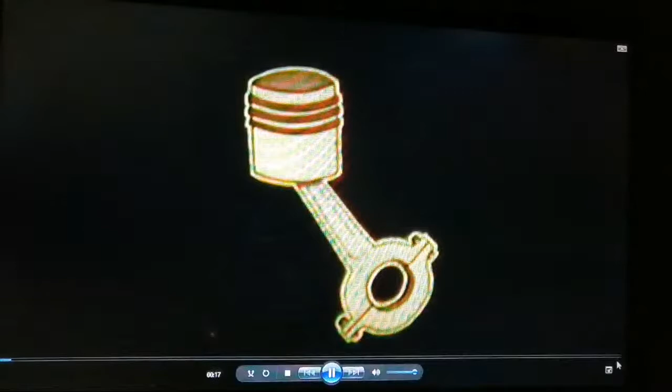Lubrication of mechanical equipment is important. For example, we check the crankcase oil level periodically when getting gas for the car. If the crankcase were dry, bearings would bind or seize, and we'd have an expensive repair bill. As with your car, proper lubrication is of vital importance in maintaining trouble-free operation and in avoiding machine damage or equipment failure at your power plant.

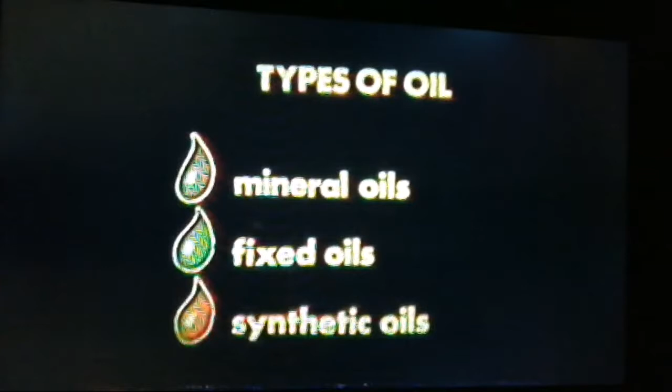There are several types of oil used as lubricants in power plants. They are mineral oils, fixed oils, and synthetic oils. Mineral oils are produced from crude petroleum by refining processes. After separation, further refining deletes waxy compounds, which become solids at lower temperatures. Then it's filtered to remove foreign matter. After this refinement, different grades are blended or mixed together to produce the various lubrication qualities desired by industrial users.

Fixed oils are of vegetable or animal origin and are usually called organic oils or greases. Vegetable oils are produced from seeds or fruits or plants or trees. Some of the more common are castor, olive, coconut, and peanut oil. Lard oil is commonly used as a thread or machine lathe cutting lubricant. One or more of these compounded with mineral oils form a steam cylinder oil lubricant, which will mix with steam and still lubricate well. Animal oils have very little value as lubricants when used by themselves.

Synthetic lubricants are compounded from elements other than mineral and organic oils, and in many cases are far superior to petroleum-based oils. Generally speaking, synthetics have a very wide temperature range. One type of silicone synthetic oil will provide good lubrication from minus 40 degrees Fahrenheit to 300 degrees Fahrenheit. These lubricants are quite expensive, but are stable and long-lasting. As the quality of synthetics is being constantly improved, their use is becoming increasingly popular in special applications.

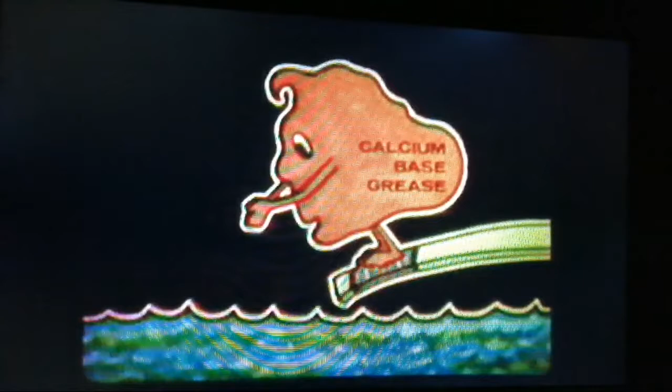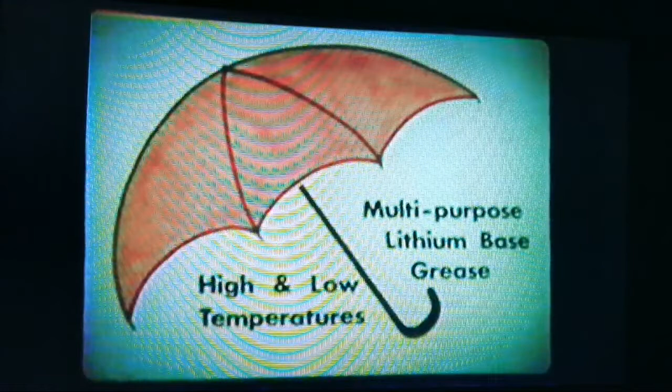Calcium-based grease is suitable for use in the presence of water and is used as a pump packing grease. It is not suited for use, however, at temperatures higher than 180 degrees Fahrenheit. A soda-based grease, on the other hand, will withstand quite high temperature, but will wash away in the presence of water or steam. Lithium-based grease is called multipurpose because it is suitable for both high and low temperatures and has good water resistance.

A synthetic grease is usually compounded for a specific use, but some cover a wide range of temperature with good results. One silicone synthetic grease will lubricate a ball or roller bearing through a temperature range of minus 100 degrees Fahrenheit to plus 350 degrees Fahrenheit. Synthetic greases are usually more expensive, but because of their versatility are usually worth the extra cost.

Fillers are ingredients added to greases to give them a more stable body. Graphite is probably the best known filler. Lead, zinc, molybdenum, and mica are also used as fillers. Fillers help basic grease withstand heavier loading and protect bearings by forming a so-called solid film, which does not squeeze out during shutdown or shock starting.

Viscosity is the term which defines an oil's internal resistance to motion within itself. It is considered oil's most important property. The most common method of expressing viscosity is the SAE rating, which stands for Society of Automotive Engineers. SAE 10 weight is a low viscosity or thin oil suitable for use in cold weather. SAE 30, on the other hand, is thicker and suitable for climates with temperatures to 90 degrees Fahrenheit.

Higher viscosity means heavier body and more resistance of the oil to flow within itself. An apt illustration is attempting to pour molasses during winter. It is then very thick and will flow very slowly. The same molasses in July will be considerably thinner and will flow much more readily. Viscosity varies inversely with temperature, that is, viscosity of oil increases as temperature decreases. Because of this, the viscosity index for a given oil always indicates the oil temperature when viscosity was measured.

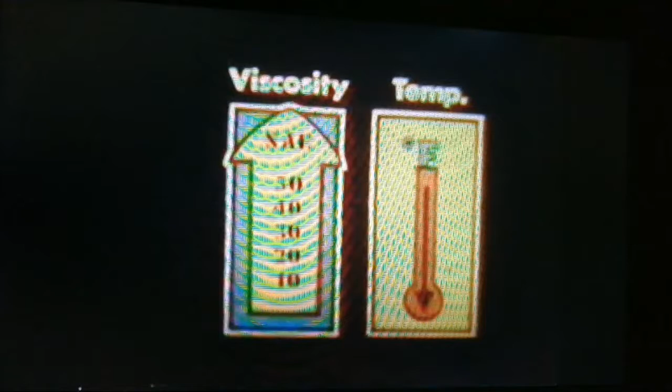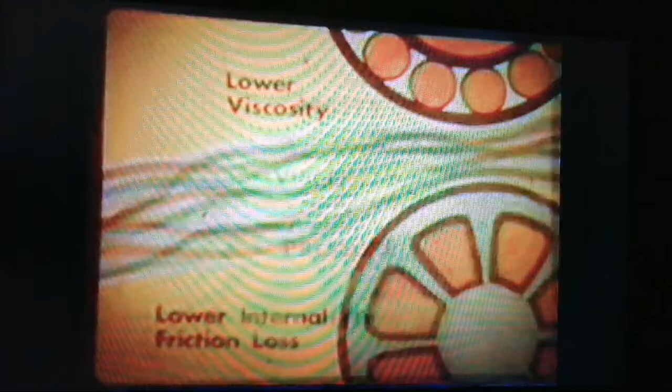Pressure also causes viscosity to change. An increase in oil pressure within a bearing will increase the viscosity of the oil. A lower viscosity oil has lower internal friction loss and flows more readily into close tolerances on high-speed machinery. As oil builds a fluid film around a shaft, pressure of oil within the bearing increases as shaft speed increases. This causes a viscosity increase, also an increase of the oil's load-carrying ability. In selecting a lubricant for a specific bearing, first the load is established. Then viscosity and operating temperature must be considered to prevent oil breakdown.

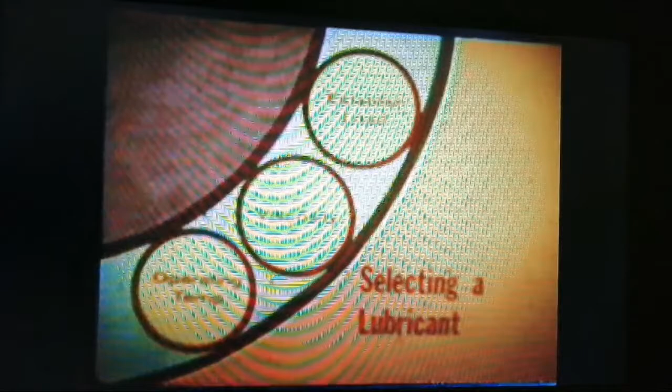It is the responsibility of the operator to make certain it's properly lubricated. Only the simpler features of bearing lubrication are discussed in this section. At your station, detailed information about your particular lubrication needs is available. Sleeve bearings, sometimes referred to as friction bearings, surround the shaft. Sleeve bearings are lubricated either with grease or oil. Slow-speed, heavily loaded bearings are usually grease lubricated, while high-speed, high-temperature bearings are nearly always oil lubricated.

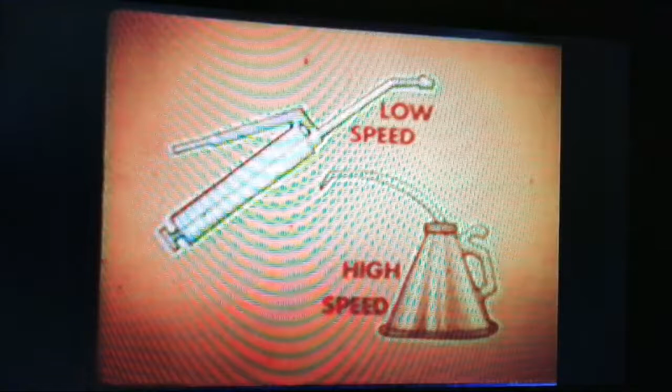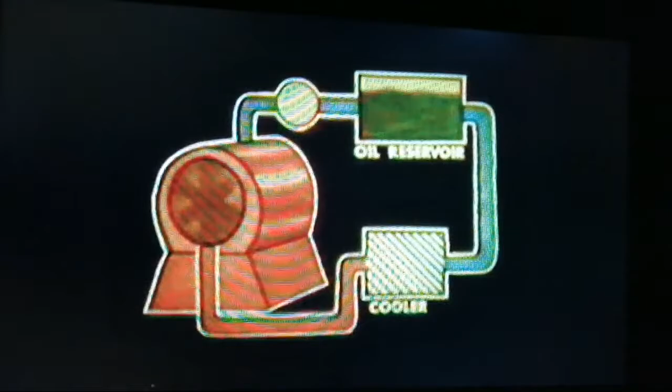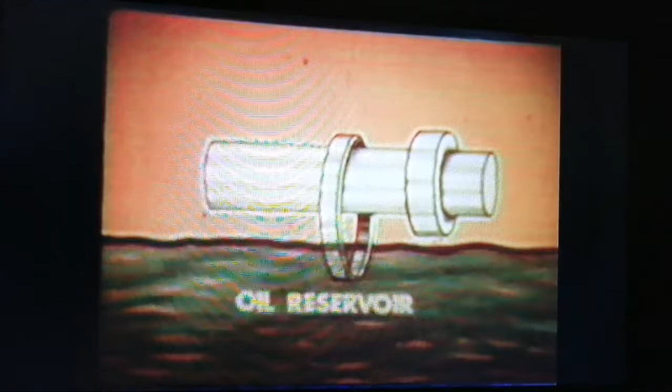Ring-lubricated sleeve bearings are lubricated by means of a ring around the shaft. The ring is larger in diameter than the shaft, and the bottom part of the ring is immersed in oil located in the bearing well. When the shaft rotates, the ring also turns, carrying oil up and depositing it on the journal.

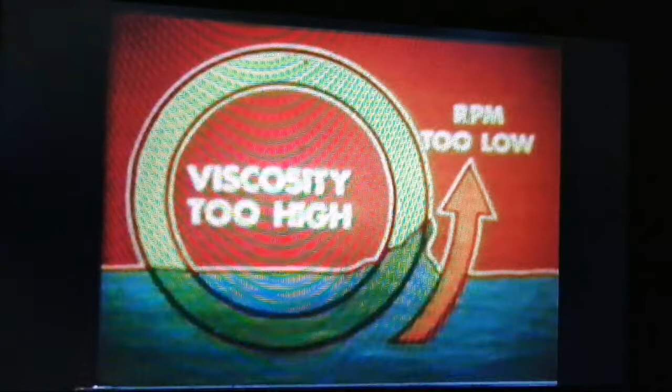The importance of proper viscosity oil in a ring-lubricated bearing can readily be seen. If viscosity is too high, the ring may turn too slowly, or maybe not at all. Conversely, if the viscosity is too low, the ring may not be able to carry a sufficient amount of thin lubricant to adequately lubricate and cool the bearing. In either case, damage could very easily result.

Ball and roller bearings are commonly referred to as anti-friction bearings. In this type of bearing, the only contact is the point contact on the balls or rollers. There's very little friction, and it's been said that the only necessity for lubricating a good anti-friction bearing is to avoid rust and corrosion within the bearing. Rust would pit moving parts and cause eventual bearing failure.

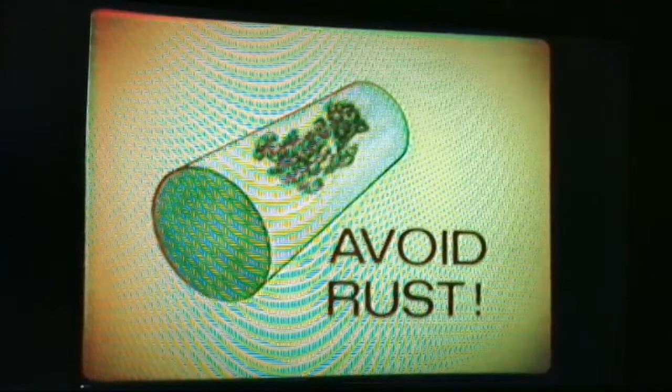When lubricating anti-friction bearings, care should be used. Fill the housing only 1/3 to 1/2 full when using grease, and only to the gauge mark when using oil. On anti-friction bearings in a very slow-speed installation, which is subjected to excessive dirt, it will be necessary to nearly fill the housing with grease to protect against contamination.

Overfilling with grease may rupture the seals and will cause heat. Overfilling with oil will cause leakage around the shaft as well as causing excessive heat. Pay particular attention to this precaution. The two major types of couplings are mechanical and hydraulic. These are described in more detail in a later section.

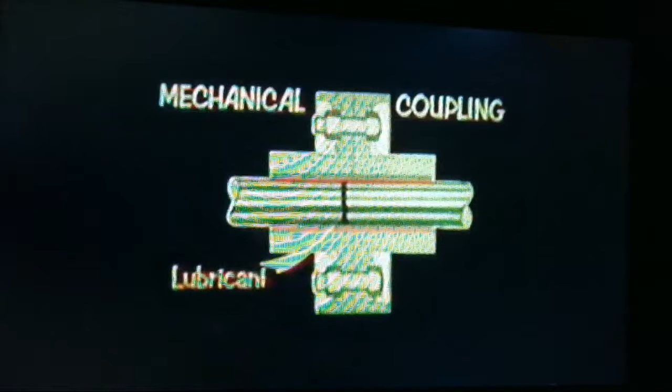The mechanical coupling is oil or grease lubricated, and the revolving motion spreads lubricant over internal surfaces to reduce friction. The hydraulic coupling uses a turbine oil for fluid. In this case, the fluid is used to transmit energy from the driver to the pump, as well as to lubricate bearings. This oil is cooled with a water cooler. On this type of coupling, the operator has only to check and maintain correct oil levels. Periodically, oil samples are taken and analyzed to determine when replacement of fluid is necessary.

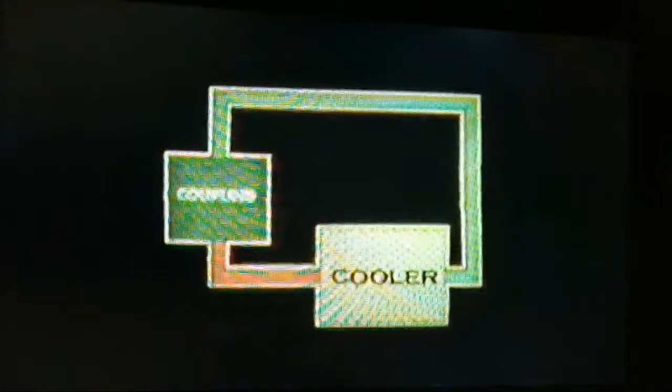Proper lubrication prolongs operating life of equipment and, of course, is a vital necessity. You'll obtain specific instructions about lubrication schedules, lubricants to be used, and procedures to be followed at your station. In order to avoid contamination, good housekeeping, as well as proper handling and storage of all lubricants, is of greatest importance. When cleaning oil storage tanks and reservoirs, do not use rags or other materials which will flake off and leave lint or fibrous particles. These particles will contaminate new oil when put into the tanks.

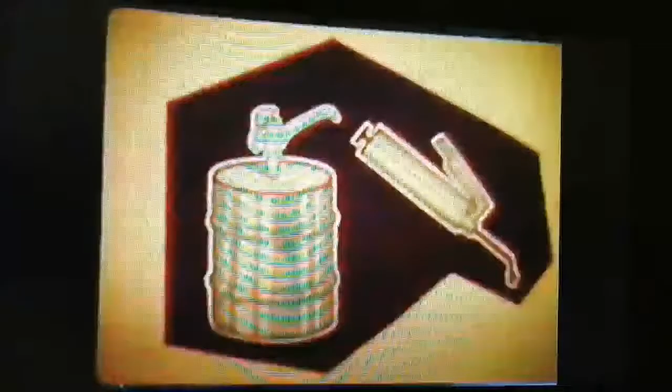Wipe all fittings clean before adding oil or grease. Hand grease guns should be arranged for filling by transfer pump wherever possible. Use only steel paddles on grease guns and receptacles which must be packed by hand. Wooden paddles may sliver. They also tend to collect dirt more readily. Always use the specified type or grade of lubricant. Your supervisor has a record of all lubrication specs. The best thing you can say is, if in doubt, check it out.

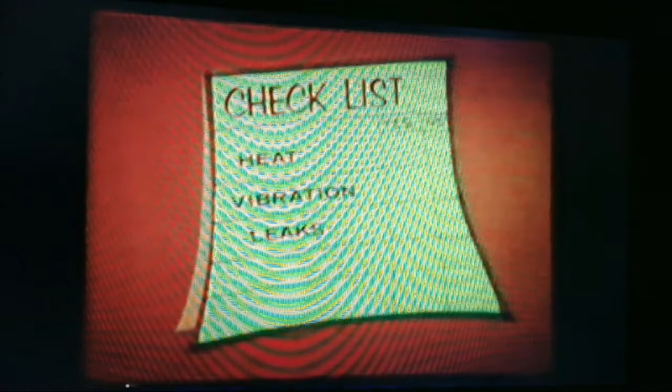Adding the incorrect lubricant could cause bearing failure. In many cases, unlike lubricants are incompatible, and a mixture tends to destroy the better properties of each. When checking equipment for lubrication, note and report anything of an unusual nature, such as abnormal heat, vibration, or leakage. Okay, it's time to turn to your Tri-Media book and answer the questions in the self-check quiz on page 24. Restart the machine when you've finished.

Wooden paddles may sliver and tend to collect dirt more readily. Number 6 is true. The next statement is true. Fixed oils are of vegetable or animal origin and are sometimes also called organic oils. For number 8, false. Ball and roller bearings are commonly referred to as anti-friction bearings. In this type bearing, the only contact is the point contact on the balls or rollers.